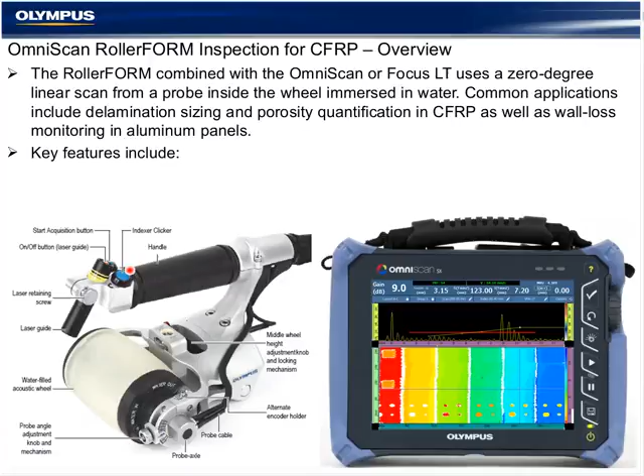It's a perfect companion to the OmniScan SX or MX2, and this presentation will take us through the setup of the OmniScan, the mechanical fine-tuning of the inspection, including the C-scans and acquisition.

Prior to setting up the OmniScan for the wheel probe, the tire must be filled with water using the in and out valves in accordance with our manual. The recommended water is distilled deionized water for best results to keep the chamber clean and free of mold and mildew as best as possible, and bubble free.

Best practice is to fill it the night before to allow the water to completely degas. The bubbles are apparent through the tire material, and there's a bubble trap on the left side wheel flange, that a slight shaking of the tire with the wheel flange in the highest position for the exit of the air traps the bubbles. It's very useful. It need not be pressurized with water, just filled completely.

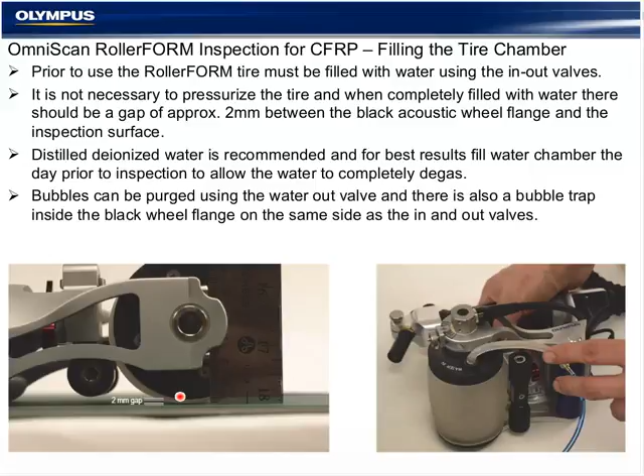A good fill is apparent when we have approximately a 2 millimeter gap between the plastic wheel flange and the component, and if we rock the wheel probe just a little bit, we can see that edge tapping. We don't want too much water in it, or it distorts the tire material and requires a little extra pressure that's not necessary.

There are several mechanical adjustments on the RollerFORM. For convex-shaped components, there is a wheel and skid plate in between the primary rear wheel that will allow a guide. This is locked and unlocked using the red handle. It's lowered into position snug against the component and relocked. For flat surfaces, flat panels, flat CFRP, it need not be used and can stay raised up off of the component.

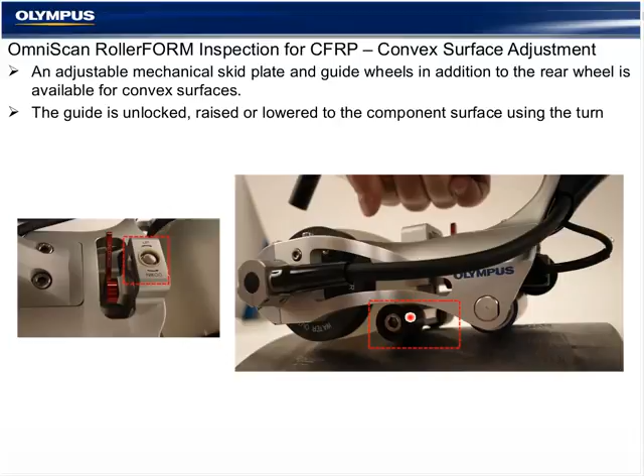We're going to start with preparing the OmniScan phased array instrument for use with the 0-degree linear scan that the RollerFORM wheel probe is designed to generate.

We're going to start going through the wizards for the part and setup. We're going to configure the UT. We're going to work to configure the synchronization gate. The synchronization gate is a feature normally associated with immersion tanks that allows stabilization of the surface interface signal for a really clean, precise C-scan. We're going to build a manual TCG for our sensitivity, and we're going to configure the detection gates and C-scan configuration.

Normal day-to-day use of the RollerFORM is accomplished by opening a pre-configured data file or setup file with the probe frequency selected. This presentation is designed to take us through the entire setup from scratch as well. But normally we save the file and make a few minor adjustments for component-to-component inspection.

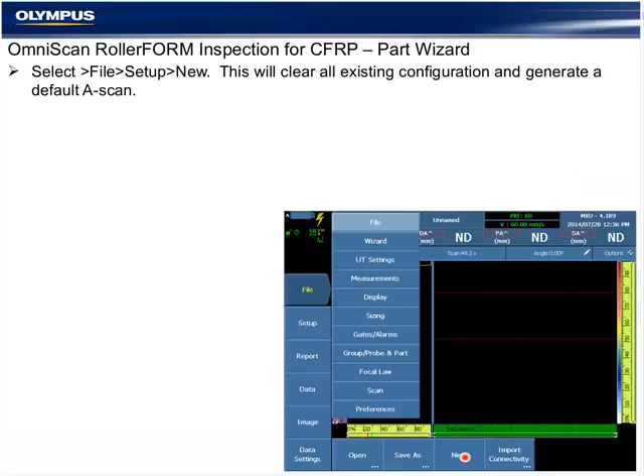So for any application in the OmniScan, to clear out all existing configuration and start with a default blank A-scan, we select File from the main menu and New. This will clear out the group and give us one default A-scan. Then we move into the wizards.

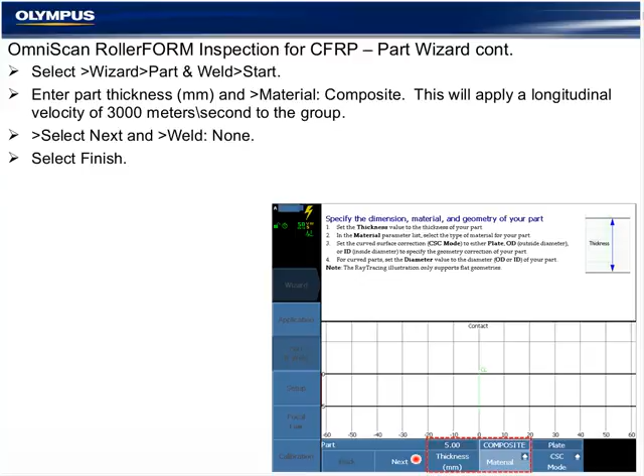On the part wizard, we're going to enter the thickness of the component and select Material Composite. The thickness entered here will have some default value in the color palette and the gate logic, maximum and minimum positions, and selection of the material composite will associate a longitudinal velocity of 3,000 meters per second with the inspection. Continue in the wizard and select Next, where there's no weld associated with this, and Finish.

That will conclude the part wizard, moving to the setup wizard. In the setup wizard, on your first step, you're going to see a group mode, and depending on the instrument model, either an OmniScan MX2 or SX, and the pulser configuration, there could be several options here.

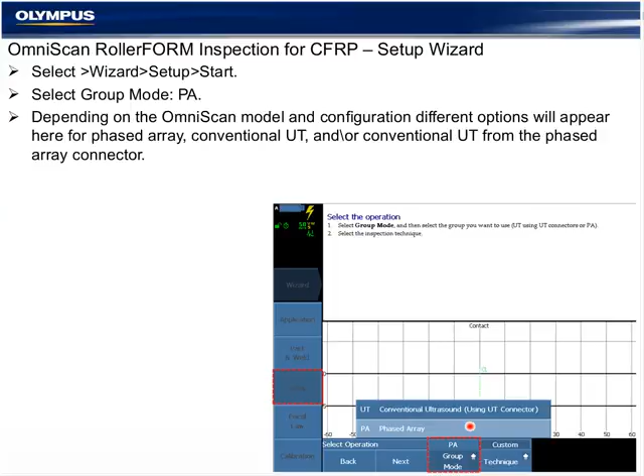The RollerFORM wheel probe is a phased array inspection only. Select phased array. And for the technique, we're going to select 0 degree. The three available techniques that we see here set defaults for the displays, the gate modes, and the color palettes, and they will shortcut our setup a little bit and put the OmniScan in a condition most favorable for this application.

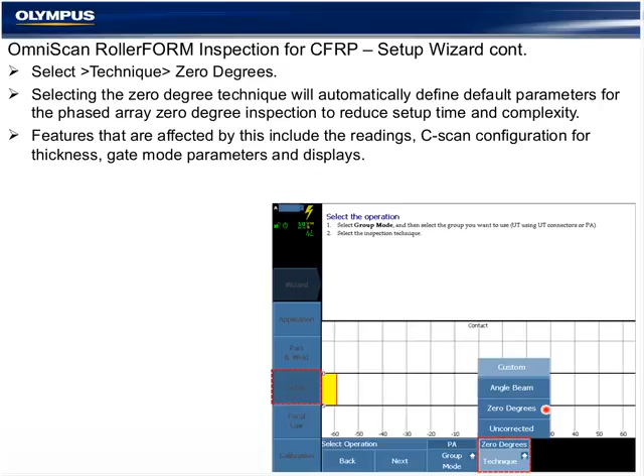Continuing on in the wizard, we will see the auto detect on. All Olympus phased array probes contain a chip that contains the essential variables for the calculator, to include the model, the frequency, the number of elements, and in this case we're going to be using a 3.5 megahertz 64 element probe that has a center-to-center element size, also called pitch, of 0.8 millimeters. The reference point in the probe is the measurement from the edge of the casing to element number 1 inside the wheel.

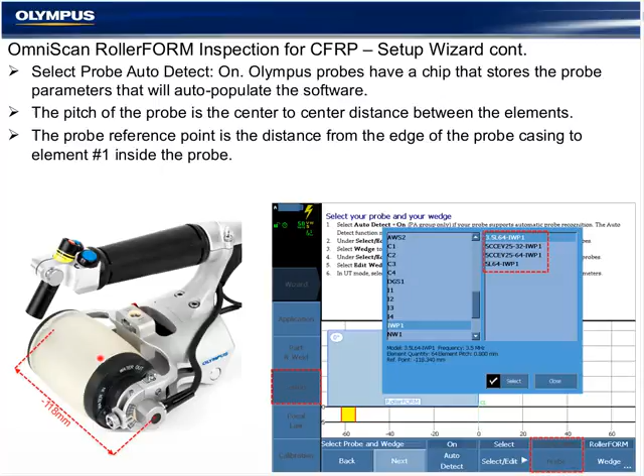The phased array probes are designed and optimized for a near wall inspection, with element 1 on the far right side of the RollerFORM adjacent to the plastic wheel flange, to be as close to the component or to the edge of the component as possible. The left side of the probe is not utilized here and contains a little bit larger wheel flange that also contains the bubble trap. The natural scanning pattern is going to start on the bottom right, moving forward and indexing right to left, that we'll learn a little bit more about.

The several different probe models are available now in different frequencies. All of them are designed to be used in water with an optimized impedance matching layer in water for the probe surface. On any probes in the Olympus catalog where you see a CCEV, it means that the probe contains a mechanical focus in the lateral direction for optimized and improved length sizing on the scan axis. In other words, we're combining a mechanical focused probe along with the phased array focusing for a more precision inspection.

The upside of using a CCEV probe is that length sizing is improved. The downside is once that radius is made, it's relative to a finite range of thickness, which for the composite inspections, normally most of these that we see are a couple millimeters to less than maybe 20 millimeters thick.

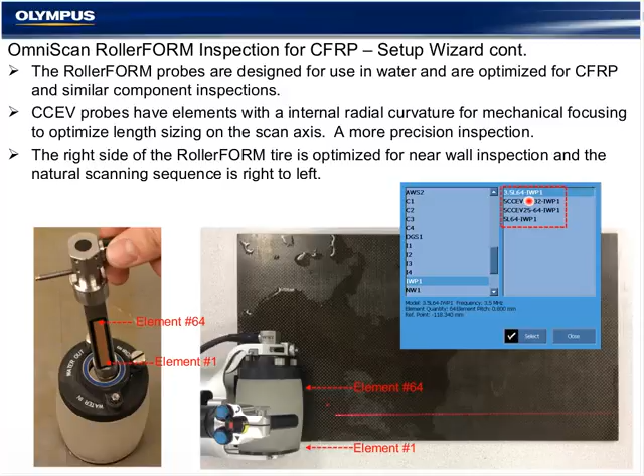Moving on to the probe selection, continuing through the setup wizard, the wedge selection, continuing through the setup. The wedge or the RollerFORM wheel probe is not automatically detected. It is selected from the database. The wheel in the tire material contains a 25 millimeter standoff in water to put our surface reflection far enough out in time it doesn't interfere with our inspection.

It has a wedge material that is water velocity, and it is optimized for a normal 0-degree inspection. The offset for the wedge, and anytime you're using an Olympus wedge from the wizard, as soon as I select this wedge, the reference from the probe is no longer needed, and the reference becomes from the edge of the wedge, and in this case is the far left side of the wheel flange that contains the bubble trap. So we have 64 millimeters from this side containing element number 1.

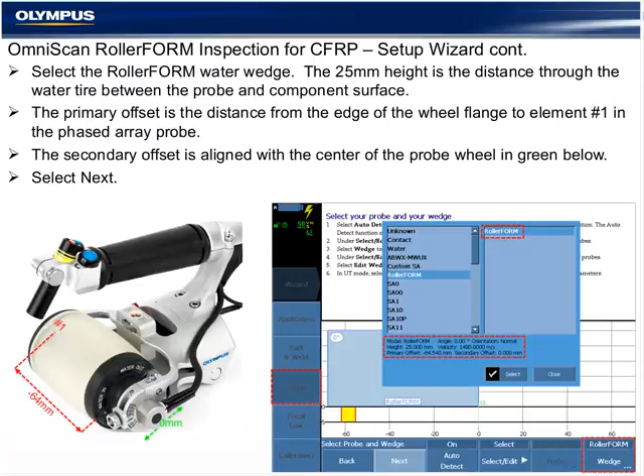Continuing on in the setup wizard, we select a skew of 90 degrees. The skew represents the beam orientation in relationship to the mechanical movement, which is also the scan axis or blue ruler, and should be left at 90 degrees. Our index offset for now is going to be left at 0.

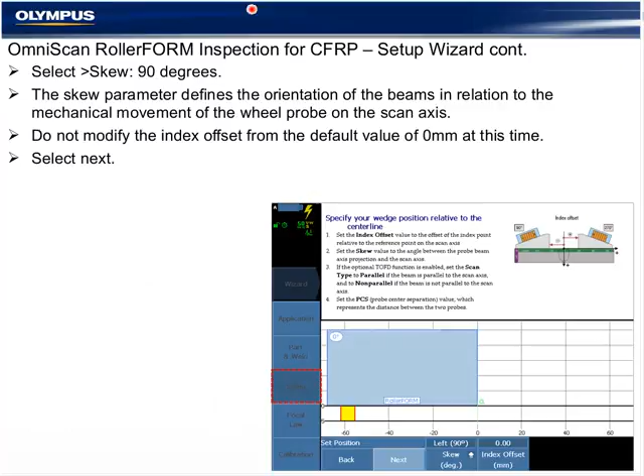At this point, the probe, the wedge, and the component have all been entered, and those parameters are known to the software. Now it's time for the fourth part of our group, which is the focal law. All calculators for phased array, regardless from Olympus, OmniScan, or TomoView, contain 4 parts: probe, wedge, material - those are all hardware with physical parameters that can be measured. The fourth part is the group formation or beam formation that we're asking from the software.

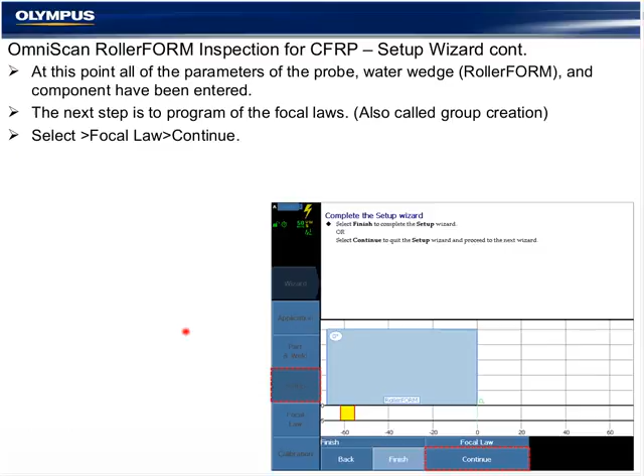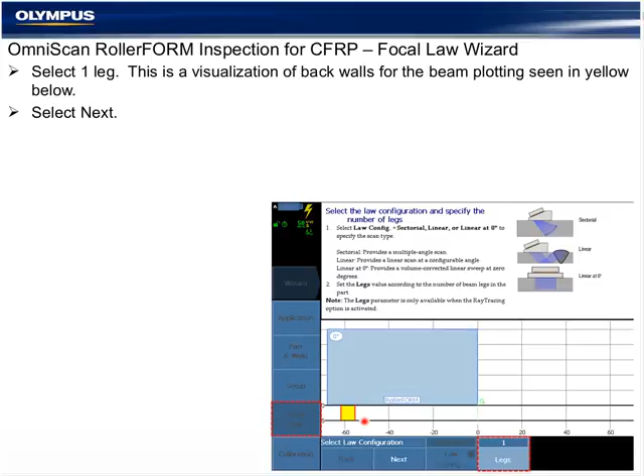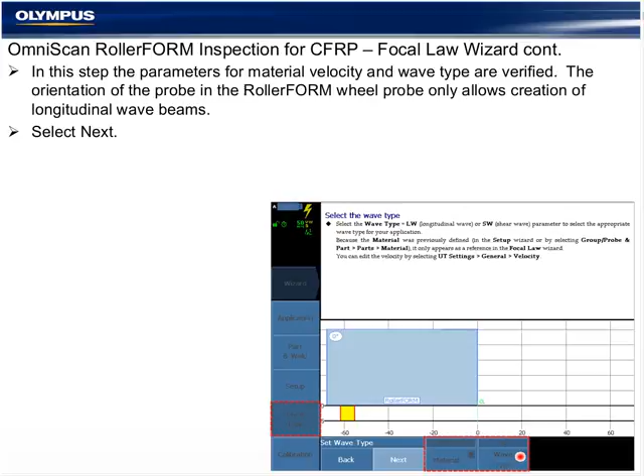Select leg 1, which represents the beam plotting for the inspection. These inspections are going to be a single leg inspection between the probe or water to tire material interface on the component to the back wall. The material was selected during the setup, and the wave type is not selectable here because this type of probe and wedge or water only generates a longitudinal wave type. So skip through this and select next. This brings us to the beam formation or configuration of the focal laws.

It contains 4 parameters. The first determines the element quantity. The element quantity will define the size of the beam by adding or subtracting elements from the quantity. With a 0.8 millimeter pitch probe using 4 elements, we essentially have the equivalent of a conventional 3.2 millimeter probe.

The number of elements here will also affect our total coverage between the first and last element, as this is beam to beam center point. So for most composites that we see, the default value of 4 is sufficient. For a thicker or more attenuative material, you may need to add 6 or 8 elements to penetrate and get a good backwall signal. That can only be determined by experimentation and is a function of the probe frequency and the thickness and attenuativeness of the material.

We want to use the first and last elements of the entire probe, from element 1 to element last, in this case 64, and we're going to step every 1 element. This would mean focal law 1 is elements 1 through 4. Focal law 2, or A-scan 2, would be 2 through 5, 3 through 6, and so forth. So on the electronic or probe side, on the index axis, we have a 0.8 millimeter resolution, the pitch of the probe.

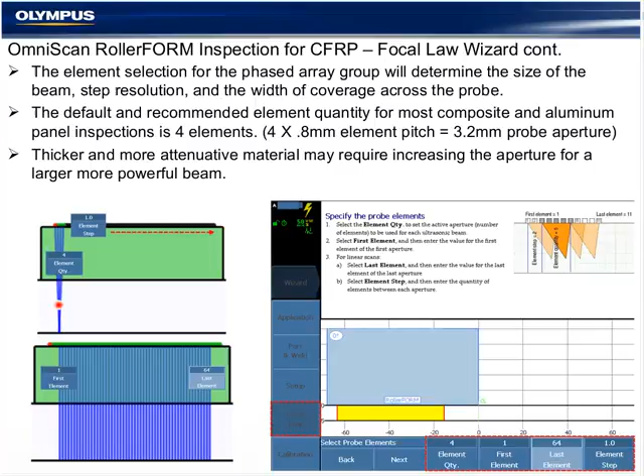There's also the possibility of what's called improved resolution or half-step resolution. For a more precision inspection, where we want to step smaller than the pitch of the probe, entering 0.5 at this step will create a focal law or A-scan of 1 less element in between every A-scan, similarly to the previous slide. That has the effect of creating a simulated or electronic version of a half an element.

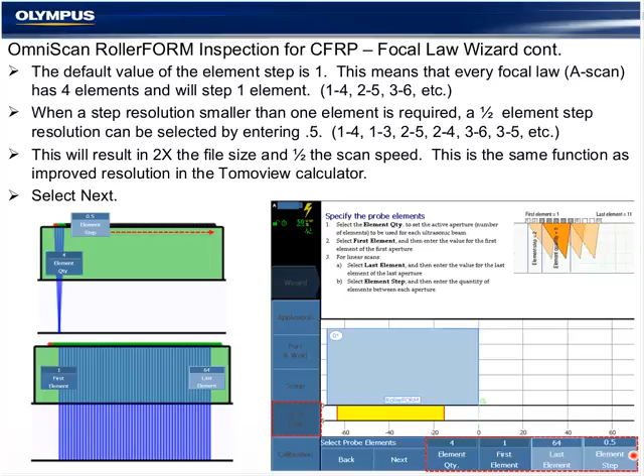In that case, we would be stepping every 0.5 elements. The upside is a much better precision inspection, but the downside is the file size will be twice as large and the scanner speed half as much. If that's not a consideration in the inspection, it's possible. This is the same function as improved resolution in the TomoView Advanced Focal Law Calculator. Select Next.

At the end of the Focal Law Wizard, the software gives us the opportunity to set our gate as to shortcut some of our setup. It has nothing to do with the actual focal law creation. A good starting point would be about 1 to 2 millimeters. We want the gate as close to the interface signal as possible, and we need enough width to include gate A, the red gate, all the way over the back wall. We'll fine-tune this once we get into inspection preparation. Select Next.

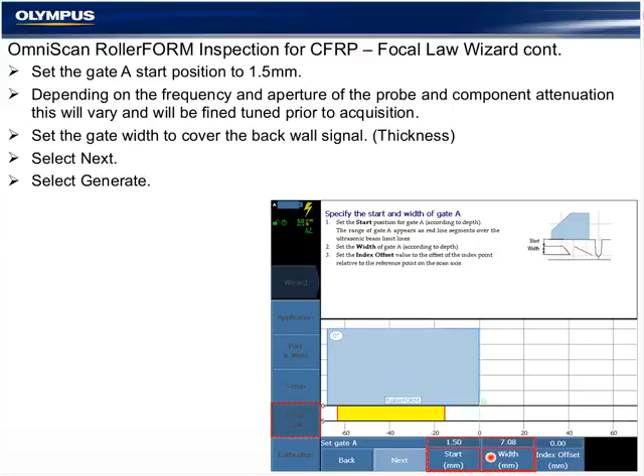At this point, we have completed all of the wizard steps for the probe, the wedge, the material, and the beam formation, and we are looking at the A and S scan. If the A and S scan wasn't already displayed, from the interactive title bar at the top of the screen, selecting Layout allows you access to all of the different layouts, and select A and S.

At this point, we can see this is the water inside the tire material. This is the interface signal of the tire material to the component, and we have a very light detection of the component here. We can also see that as the probe is moved in the RollerFORM back and forth and side to side, it has not been stabilized yet. We see a few millimeter difference on one side of the probe inside the tire material than the other, and this can be due to pressure or the shape of the component or just normal use.

The probe is not stabilized inside the material, but we will use a synchronization on echo to flatten this shortly. This is a normal looking indication when you're initially leaving the wizard setups. The OmniScan has 3 visible gates. A red gate A and green gate B are detection gates, with red being the primary detection gate.

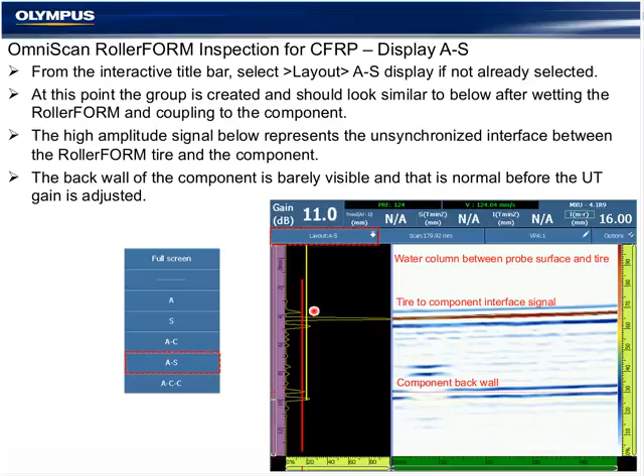It's normal that the yellow gate disappears when we're in A-scan synchronization mode because it's dynamically updating for every A-scan to build the S-scan display, similar to an immersion tank. And as we can see, once we enter A-scan synchronization mode, the yellow gate disappears and my interface signal is completely flat and straight and automatically aligned at 0 millimeters. This is a very important feature for either a RollerFORM or an immersion tank, as it allows precision measurements inside the C-scan to be relative to 0 instead of relative to the distortion of the probe in the tank or the RollerFORM.

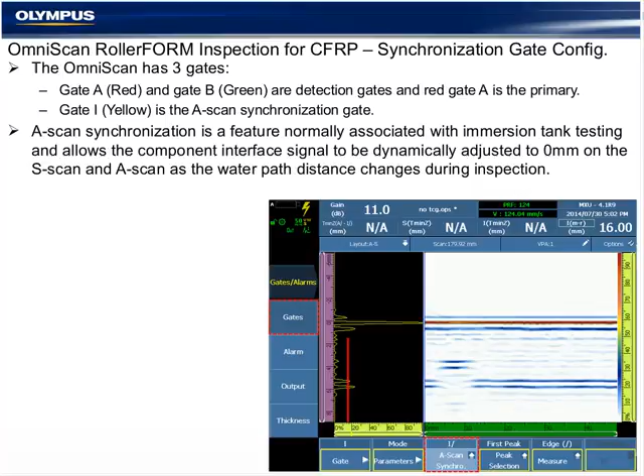The normal mode for this would be pulse. And again, our signals, both for gate A for the detection readings and for gate I for the synchronization readings, are going to be using the first peak that crosses the gate and the edge of that peak. And these functions for the A-scan gates are also included in the readings that are associated with them.

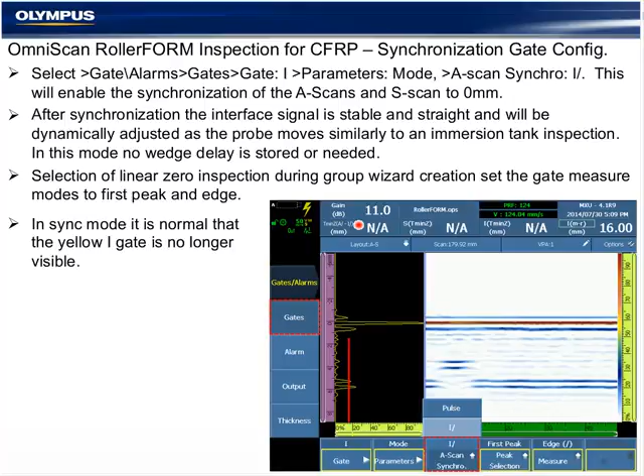After we've gone into synchronization mode and stabilized the signal through the water path, there's a second mechanical adjustment in addition to the middle wheels and skid plate that was associated with this knob. The second mechanical adjustment allows us to rotate the probe clockwise or counterclockwise to optimize the probe orientation directly at 0 degrees to the component. When I move this adjustment, I can see the amplitude of the interface signal either rising or lowering. So I'm going to peak that up to where it's optimized. And when it is, I will lock the probe in place.

And on a flat plate, this is locked in place between the stabilization of the rear wheels and the roller plate. Or in a convex inspection, it would be stabilized between the middle wheel and skid plate and the probe. So loosen the probe with this knob here, turn it just slightly counterclockwise or clockwise to optimize the interface signal in amplitude, and lock it back in place.

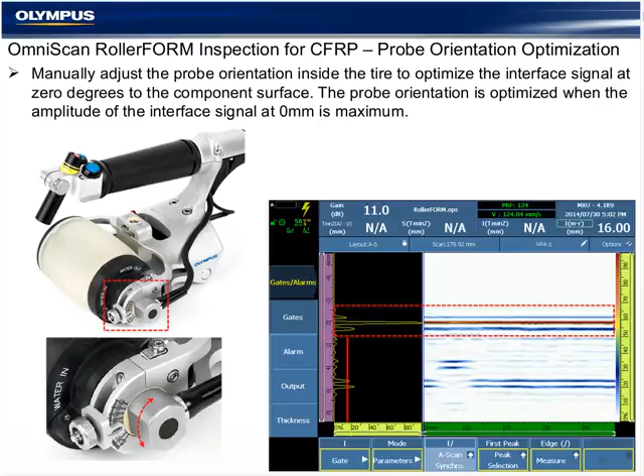After we've done that, we want to go ahead and fine-tune our range so that we have a normal looking display. Start the range at -1 or 2 millimeters so we can see the water column just on the other side of the tire material inside the wheel. Any bubbles that were interfering with the inspection can be seen here. This allows us to validate that the whole S-scan is being detected in the interface gate, the yellow gate I, and set enough UT range so that the back wall is completely visible plus a few extra millimeters.

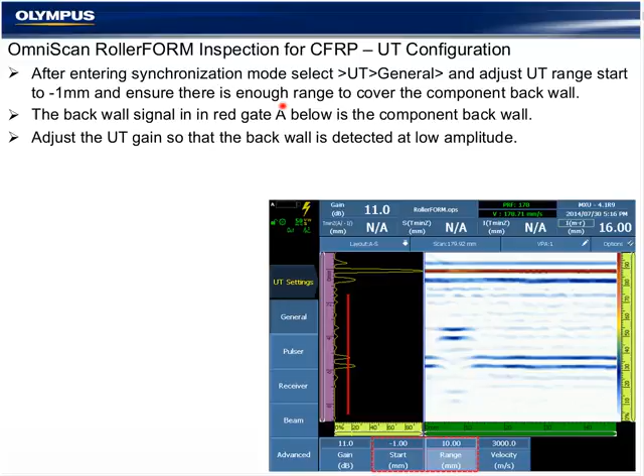At any time, in full screen mode or with the menus visible, tapping on the first half of the UT ruler, which is purple, will enable the operator to adjust the UT start. Tapping on the second half of the ruler will enable the operator to manipulate the UT range. Similarly, tapping on the dB area or the gain area in the upper left-hand corner of the OmniScan display header allows the operator to manipulate the gain, hardware gain, using the rotary knob on the side of the instrument.

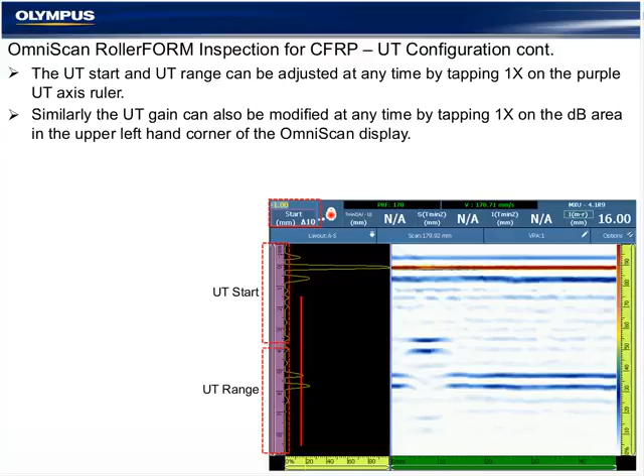So we're now in synchronization on echo or A-scan synchronization mode. We have built the group, which is the sum of all of the focal laws in the S-scan and make up group 1. This is a single group application. And now we're moving on to the UT configuration. Most of the UT parameters are very similar to a single channel conventional flaw detector in that what we do to one applies to all of them.

So we're going to start under the UT menu, under the pulser submenu, and select the voltage or energy appropriate for the inspection. Voltage selection is a function of the element size in the probe, the element frequency, the attenuation of the material, and the thickness of the material. Too low of voltage results in unnecessary gain, resulting in poor signal-to-noise ratio. Too high a voltage will give us a saturated signal even at 0 dB.

So I would suggest starting at 80, which we found works very well for most of the composite inspections, but adjust this appropriately. The pulse width need not be adjusted. It was automatically selected when the probe frequency was detected by the software.

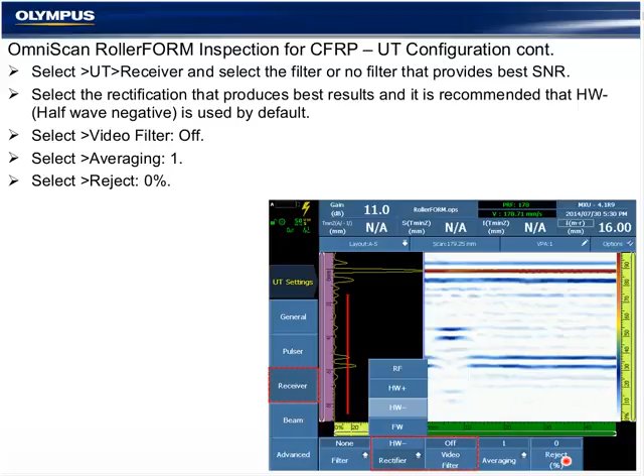And filter selection. The short version is to use the filter that works best. When no filter is selected, we are benefiting from the full bandwidth of the probe frequency, and as soon as we select a filter, it's going to crop off portions of that. Use what works best, but don't be surprised if best results are achieved with no filter selected at all.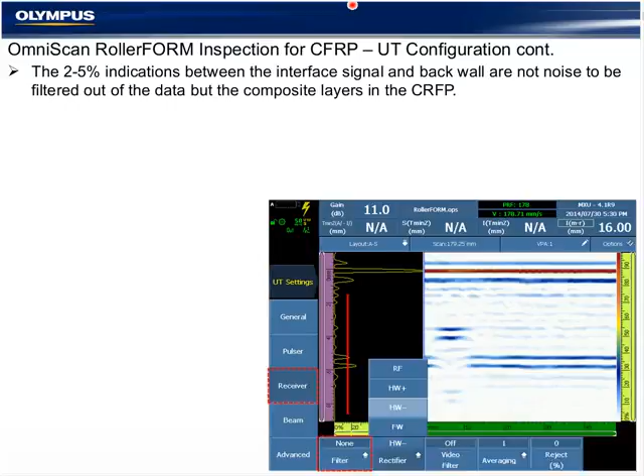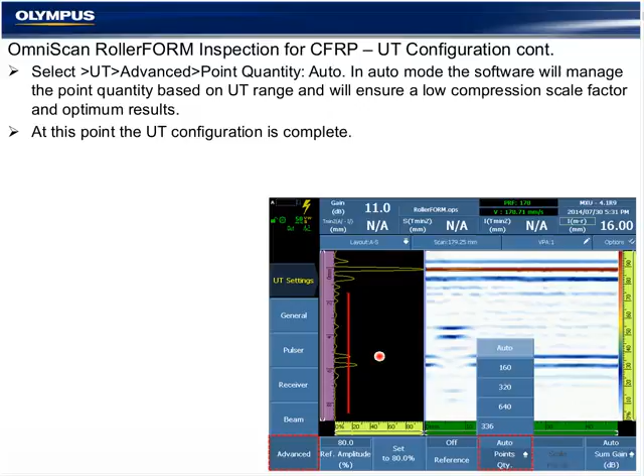Under UT Advanced, change the point quantity to auto. The auto point quantity will ensure a low scale factor and compression factor regardless of what range is being used. The CFRP inspections and typical aluminum panel inspections in the aerospace industry are typically short range, and this isn't an issue like in weld inspection where it becomes a critical function of both file size and acquisition speed. So auto is sufficient. So at this point, all of the UT configuration is complete. Our interface signal is good, and we're preparing now to move on to the next step.

In general, the 0-degree linear inspection, both for aerospace components or for any corrosion type inspection, is defined by its near surface resolution. It's something we want to be mindful of in our setup all of the time. And what the near surface resolution means is the smaller we can make this signal, the better our inspection is, or the more likely we will find a flaw and be able to gate it on our first attempt near the surface. This gate position will need to be as close to this as possible, and again, we'll fine-tune this and talk about it a little bit more when we get into inspection preparation.

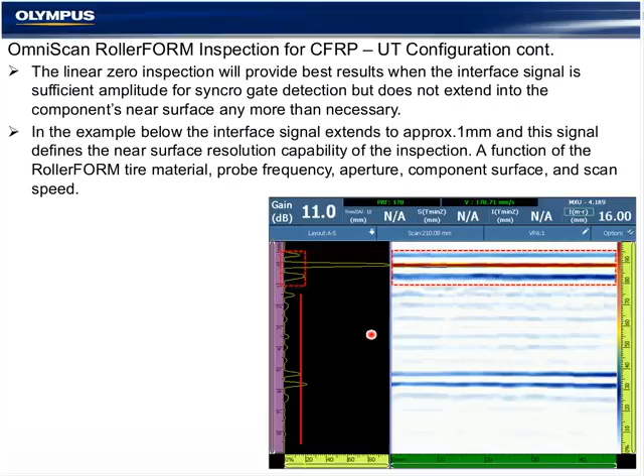So for our good inspection, here is our surface interface signal, and here is our back wall. We need to make the back wall as large as possible without increasing the size of our surface interface, which would hurt our near surface resolution. So how do we raise the amplitude of this signal without raising the amplitude of this one with the hardware gain? We're going to use a manual TCG. Select Menu Sizing, Submenu TCG, and select TCG.

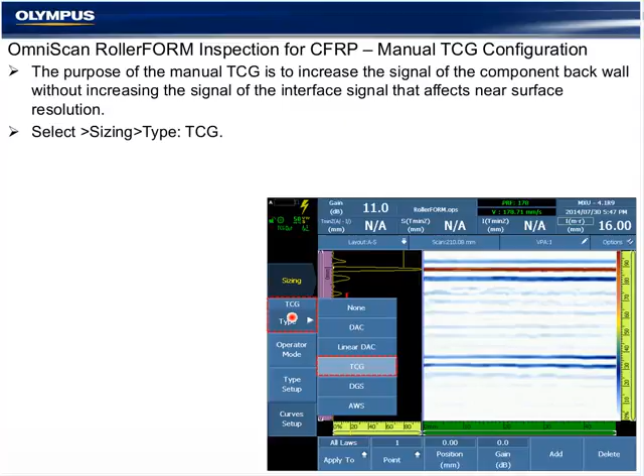After TCG is selected, select Curve Setup, and you will see a default point 1 with no gain at 0 millimeters by default. We're going to move the position, and we can see the TCG point is the white dot right at 0 amplitude on the UT ruler. We're going to increase the position here to move our TCG point slightly off the interface so that no gain is realized prior to the TCG point.

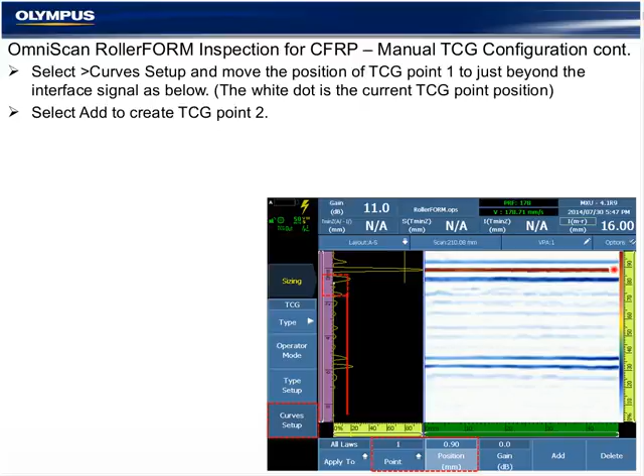Select Add to create TCG point 2. And by the way, this same TCG curve is applied to every A-scan. This is A-scan first. This is A-scan last on the S-scan. It's applied evenly to all of them. So on TCG point 2, change the position until the white dot, which determines the current TCG point, is directly on the backwall signal like we see here at 5.82 millimeters.

And manually increase the gain here until the signal is approximately 75 to 100% amplitude. Since we're using a first crossing signal, it doesn't matter if this signal is saturated or not, but the best of scanning techniques would normally have it pretty close to 100%. This ensures a minimum loss of data in the gate and a maximum acquisition for our C-scan creation.

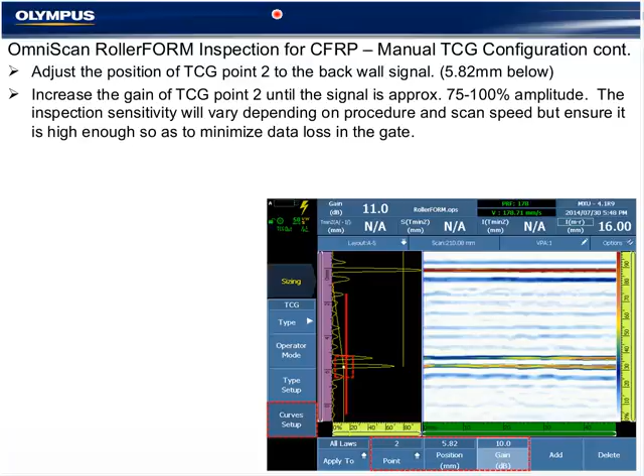So it's time to add the C-scan to the inspection now that we've fine-tuned our UT and our inspection sensitivity. From the interactive title bar, select the layout by tapping on this area in the touchscreen and select the ACS layout that will enable the C-scan. The default C-scan that you see now is a time-based C-scan that will move at the speed of the PRF based on the inspection resolution, and we can see it's based on time from our clock acquisition that we see here.

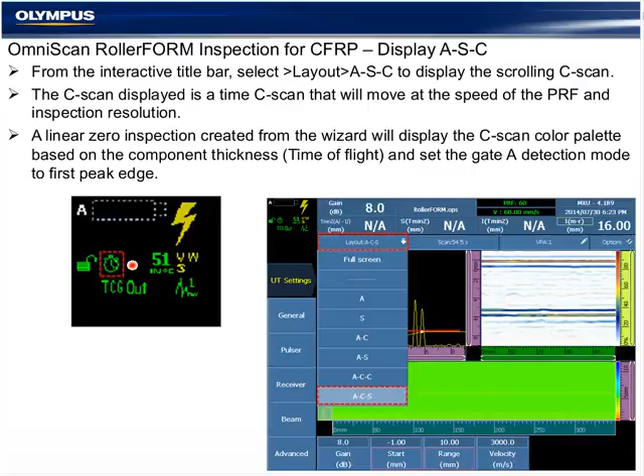Change the gate thickness source under the gate menu, submenu thickness, select source, and we're going to use for the color palette and for our readings the signal in gate A crossing here minus the signal in gate I crossing here. That will ensure a stabilized reading from 0 millimeters at the surface interface.

Enter the minimum and max. This is defaulted to the part thickness and it can be adjusted. This thickness range here will determine the purple scale that we see here, and it can be shortened during analysis mode as part of fine-tuning our analysis.

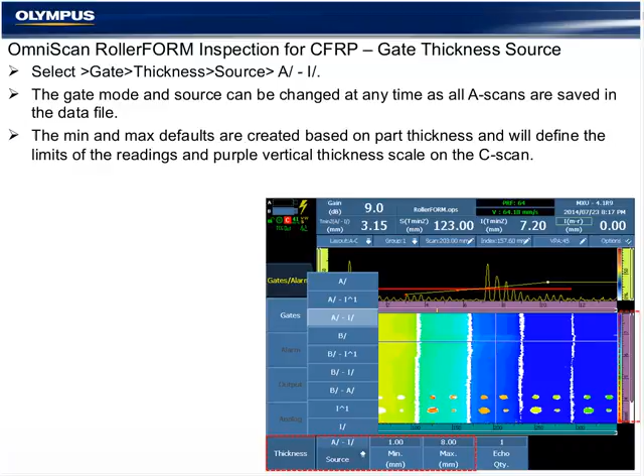Continuing on to the display color palette, select Menu Display, Submenu Properties, Color Palette Depth, and by default we'll see the same scale here. In the previous slide, that min-max range controlled the purple ruler on the UT reading here, and this will scale the color palette over that value from red to blue. And that can either be a compression or exclusion mode.

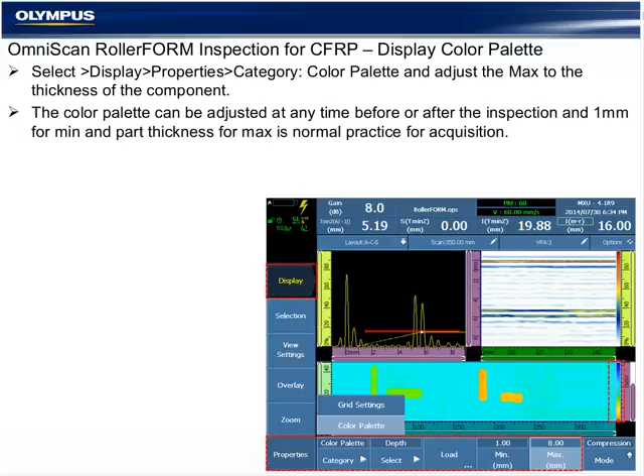And we can see here that the color pixel seen in the C-scan is a function of the arrival or time of flight of the leading edge signal in gate A, and its color is determined both by the scale that we see here under the UT gate thickness, source, and the color palette distributed. As I change the color palette min-max, I will also see this contrast change inside the C-scan. The default values are normally a great place to start.

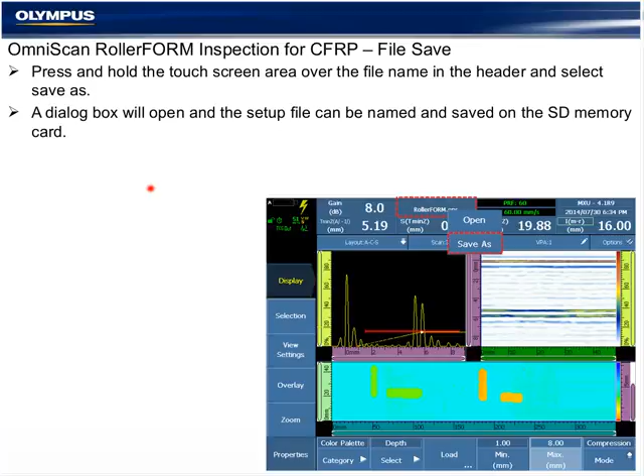So at this point, our configuration of the OmniScan, not including the hardware from the RollerFORM yet, is complete. The phased array was configured for a linear 0 degree scan using all 64 elements of the probe. Our gate mode position was optimized. We are in A-scan synchronization mode that was determined from our yellow gate I, and we saved the file by a press and hold on the file name area of the OmniScan header. Select Save As, and a dialog box will pop up to allow us to save the file on the SD memory card.

The next part of the presentation, and this is a separate presentation in the follow-up files that you'll receive from this webinar, is a configuration of the hardware on the RollerFORM wheel probe with the OmniScan. So that's going to include the configuration of wheel encoder 1, which is associated to the scan axis. It's going to configure the increment button that we see here on the RollerFORM that works as a clicker on encoder 2. And it will include the configuration of the DIN, or digital input button, for start acquisition and clear inspection, for repetitive inspections without having to touch the instrument.

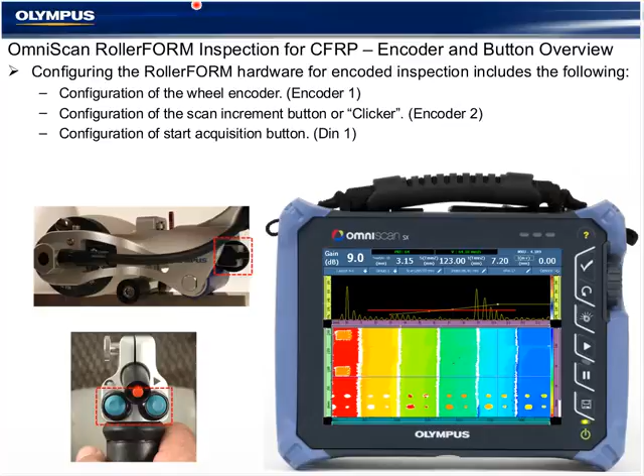So the first part of this is the encoder 1, and to put the instrument in encoder 1 scan, we're going to select Scan Menu, Inspection, and we will change our type from time, that we saw as a little clock in the notification area, to raster. When we select raster scan, it will slave one of the encoders that we select to the scan menu. So when we select encoder 1 here, which is wired to the wheel on the rear wheel guide, it will slave this wheel encoder to the blue axis, also called the scan axis.

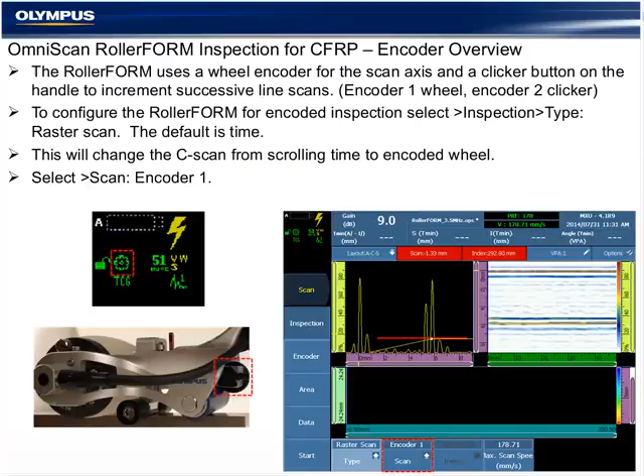Selecting Scan Encoder allows us to configure the resolution and type for the wheel. This is a standard Olympus quadrature encoder. It has a resolution of 12 millimeters that is written on the encoder. You can also calibrate the encoder if that's part of your procedure, or if something has changed that would have affected the resolution, under the wizards for calibration and encoder. We can inverse the polarity and change the direction for scanning forward or backward.

This encoder 1 is slaved to the scan axis, which is also always visible in the interactive title bar. When this number is red, it means that the current encoder position is outside the defined area of the C-scan. When it's blue, it means it's inside.

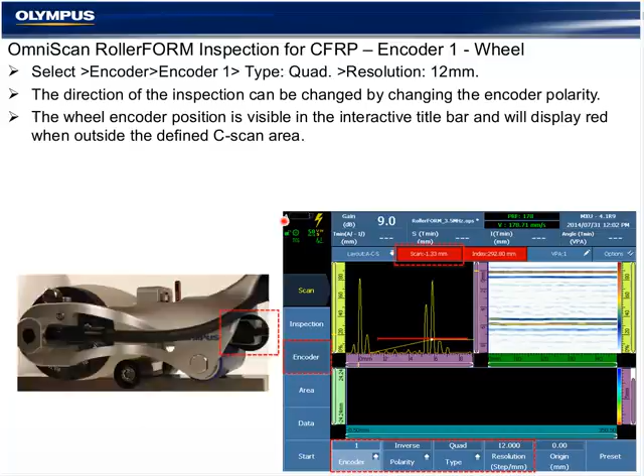The wheel encoder has a second position that it can be installed in, with instructions in the manual. So for smaller components, small radius components or convex components that are not utilizing the rear wheel guide, the encoder is working directly on the wheel flange of the tire. And there's detailed instructions for moving that in the instruction manual, and the encoder cable here is integrated into a nice ergo handle that includes the umbilical back to the instrument with the encoder and digital input cables.

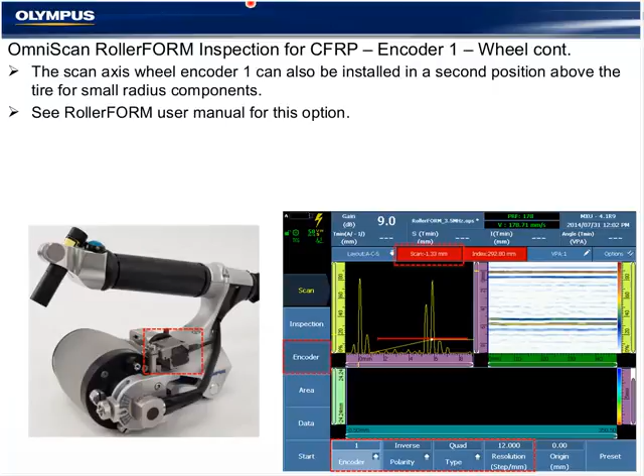Okay. Select Scan Encoder and change from encoder 1 to encoder 2. Encoder 2 is going to be a clicker and preset type encoder, and it has a resolution here that's automatically determined by the software based on the phased array configuration. We're going to talk about this a little bit more in a few slides, but the software knows at this point that center beam 1 to center beam last is 48.8 millimeters. So every click of this button will index the index axis position 1 stroke, or 48 millimeters, as it's incremented.

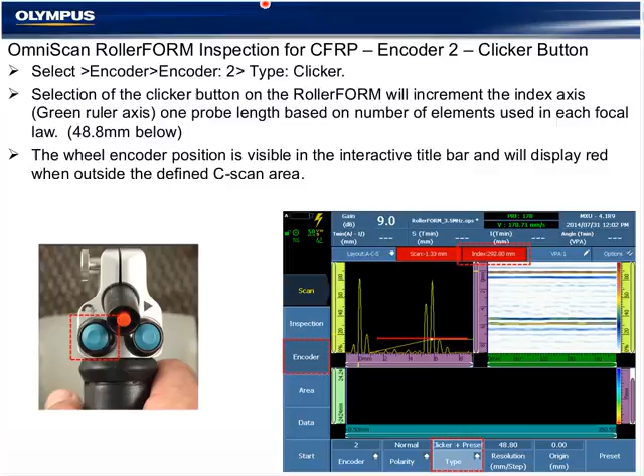And the normal inspection process for that is we have slaved the scan axis wheel encoder 1 to the blue ruler. So as I move it forward, we'll see that incrementing here. As I click the indexer button, it's going to increment me over. So I'll take one line scan to the end, reposition the RollerFORM, click the button, and it will automatically be ready to take the next acquisition.

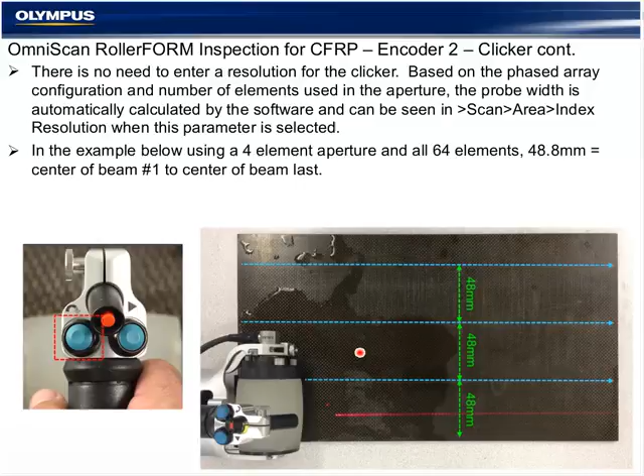There's a second button available on the RollerFORM handle on the right side, which is associated with the digital inputs that come through the same cable and connector as the encoders. These are configurable and programmable inside the software.

So select Menu, Preferences, Setup, and turn the state off. When the state is off, the options appear for the DIN, and there's several of them. DIN 1 is the only one that's wired to the RollerFORM. So any of these options are available, but the one that's defaulted in the setup files that are provided and the most useful for this day-to-day operation is the Clear All.

So when I click this button, based on my configuration here, it's going to clear the C-scan data, and it's going to set both encoders back to 0, indicating I'm ready for a new inspection. And we do that just after repositioning the scanner correctly.

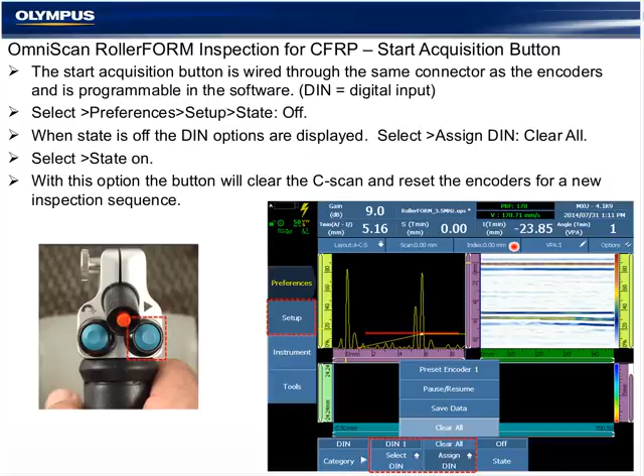So at this point, the phased array and UT has been set up. The hardware for the encoders and the digital input that interface the RollerFORM to the OmniScan have been set up, and we're ready to start preparing for an acquisition.

Our normal process for an acquisition would be to recall a pre-configured setup that we've just completed, enter the component thickness, for this is a new inspection and it'll probably change every one. We're going to fine-tune our sensitivity, fine-tune our gate position, define the current C-scan area and inspection resolution, and then we will acquire data and save the file.

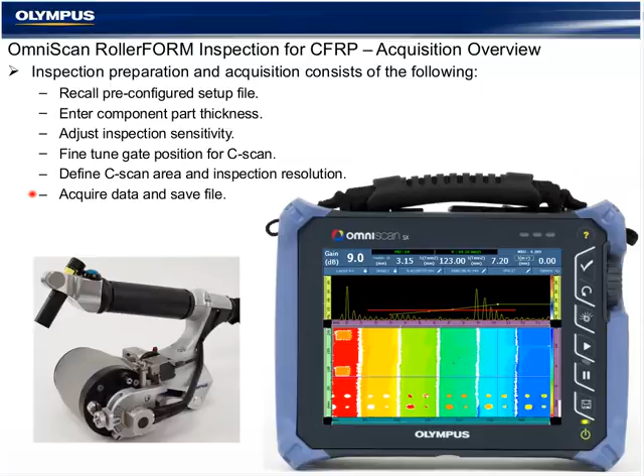So again, you're going to be provided default setup files with all of these parameters configured. This third presentation is designed to be used with either one of those files we've provided or the file you would have just created that we went through up to this point.

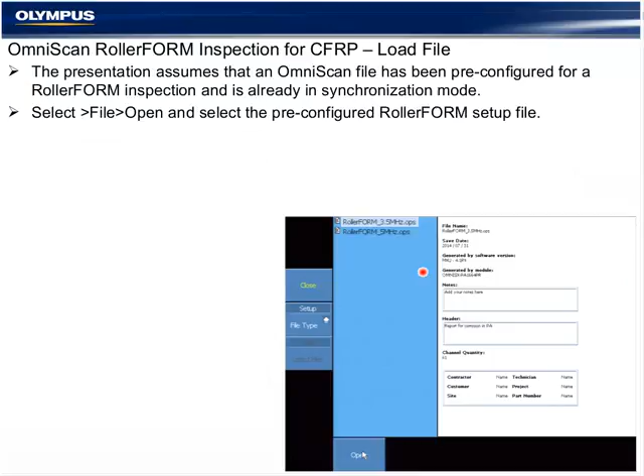On the OmniScan file name area, press and hold, or go to File, Open, and we'll see under the Setup filter the various setup files for the RollerFORM or the ones that we've already created ourselves.

So we initially input the part thickness during the group wizard. This same parameter is available from the Group/Probe & Part menu, Parts submenu, and enter thickness in millimeters or inches, depending on which mode the instrument is in.

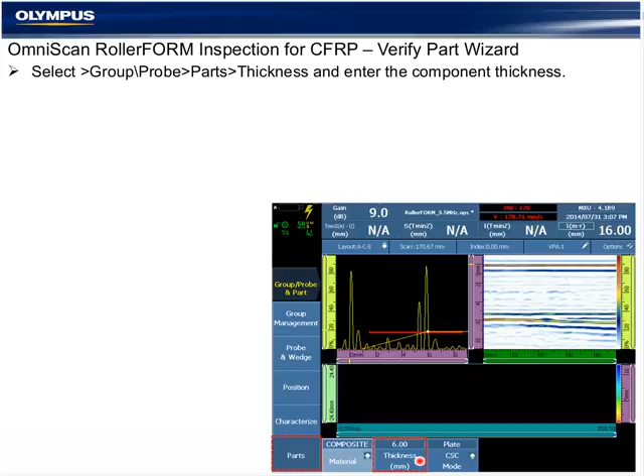We're going to fine-tune our gain a little bit, which will mean adjusting the TCG point directly over the back wall of the new component's thickness and raise and lower the gain. So we're going to make a hardware gain adjustment or general gain adjustment that will raise and lower both of these. And I'll make a TCG gain adjustment in the same spot that we saw earlier just to try and maximize this signal here.

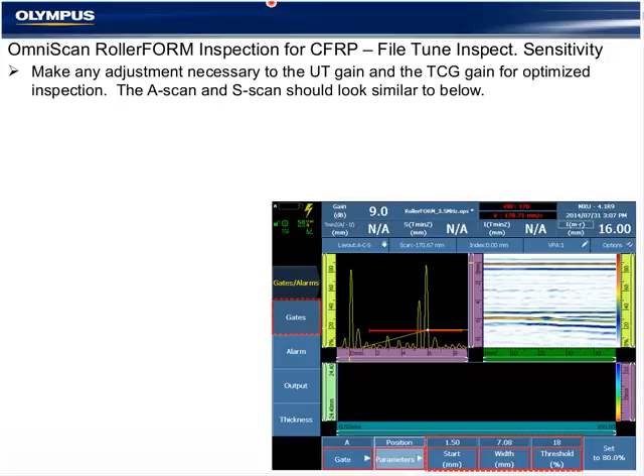Okay, we're going to optimize our gate. The gate is available from the touch screen. If I touch the gate in this area here, I will get the start in the upper left-hand corner. The middle, I will receive the threshold, and tapping the gate on this end, I can adjust the width. These are displayed here under the gate submenu.

So we want to put this gate as close as we can to the interface so we don't interfere with the inspection. The result of putting the gate too close to the interface means that it will generate red pixels of the shallowest readings throughout our C-scan. This can be changed in analysis mode after the inspection at any time because all A-scans are saved.

The width of the gate needs to include the total back wall, here. The threshold needs to be high enough so it doesn't include the layers; this isn't baseline noise, but the actual composite layers.

There was a question about what options, if any, are available on the probe width. There are two options: a 32 element, a small version of the wheel probe, and the 64 element. The 64 element probe would be 64 total elements times 0.8. So if you were theoretically using a one element aperture, the maximum width would be 51 millimeters. With 4 elements, it would be about 48.

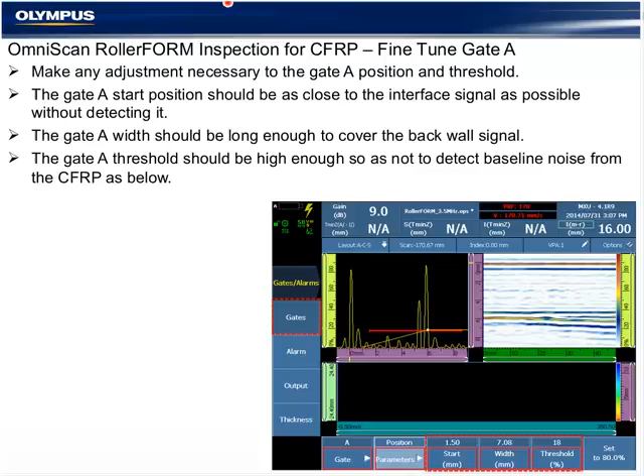We're going to fine-tune our C-scan a little bit for the index offset of the probe. When we selected raster scan from the scan inspection type, the software automatically moves the 0,0 position on the probe to the center of the probe. This is a feature that's used in immersion tanks that makes rapid scanning with overlap extremely convenient and fast.

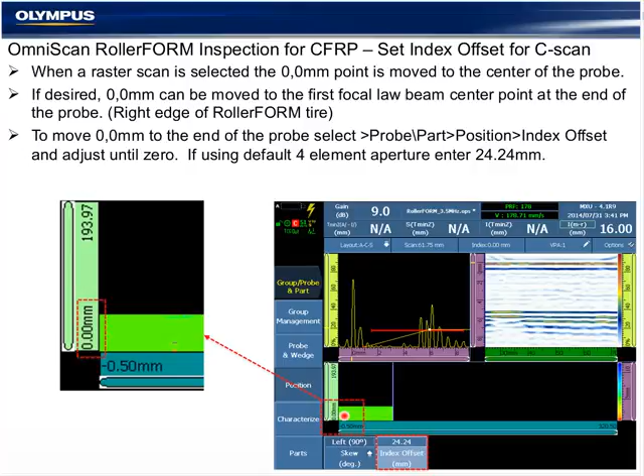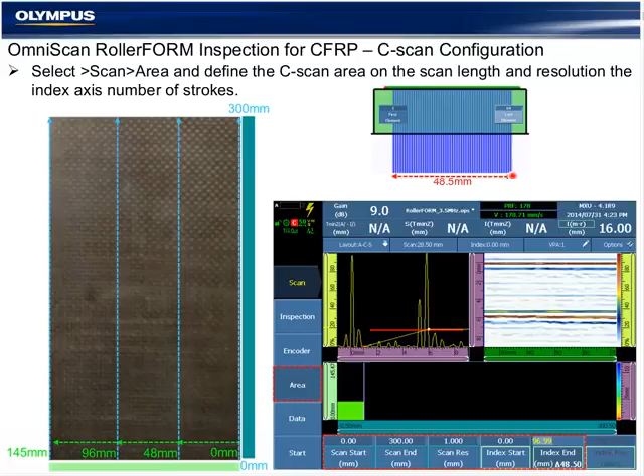When a red C is present in the upper left-hand notification area of the OmniScan header, it's an indication that the C-scan is in compression mode. Compression mode occurs when there are more data points in the C-scan than available pixels on the window of the OmniScan or on the window of your computer, which would be based on the size of your monitor. Compression is very important for this type of inspection because it ensures you don't miss a critical data point.

When in compression mode, the software will allow 1 pixel in the C-scan to represent 4 or 16 pixels in the data, and it will ensure that it's always displaying the pixel color of most relevance, which is the thinnest color for 0 degree and position C-scans, or the maximum amplitude for amplitude-based C-scans typical of weld inspection. Zooming on the C-scan will eventually make the C go away. It's completely normal to do analysis while we are in compression mode, as we can be sure not to miss a critical pixel from the compression feature.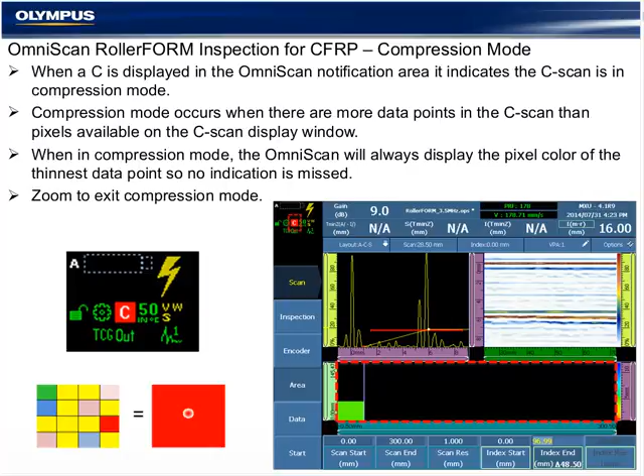Placing the RollerFORM with this wheel flange at its highest position, gently tapping on the roller material on the tire and moving it around and tapping on it, we can see the bubbles inside through the tire form. It's opaque, and they will be trapped in this, so it's very efficient. Even when there are bubbles present, they only degrade the inspection on an overhead inspection where the bubbles are in between the probe and the component surface. In normal flat or even angled inspection, it's not normally a concern, but it's very easy to get rid of them using the bubble trap and the out valve as well.

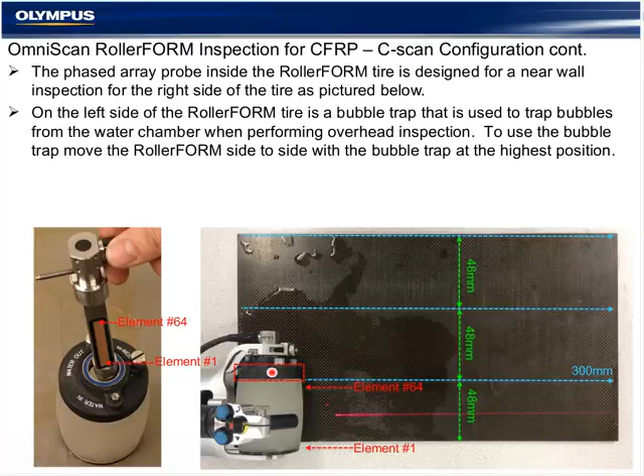So we're prepared for the inspection. We've got our acquisition ready, all the phase array, the encoders, all the hardware. We've configured our C-scan. I moved the beam center point directly under focal law, or A-scan number 1, which would be here and here. And I'm ready to start the acquisition.

I'm going to turn on the laser, and I'll twist it so that it's aligned straight with the component. I could have prepared ahead of time some chalk marks on the composite or aluminum panel to align my 48 millimeter stroke. I can have a scan speed of 178 millimeters per second. Again, that's very fast and typically a lot faster than most people would scan comfortably without losing data points.

This wheel material is permeable, and saturating that real good with water prior to the inspection allows a very light spray. This picture is showing a lot of water, but it really just takes one shot from the water sprayer. A real light spray is sufficient.

So we will select the Start Acquisition button here, and that will clear the C-scan. It will reset the scan and index encoders at 0-0, preparing us to take the acquisition. We would normally be in full screen mode from the layout on the interactive menu. In full screen mode, I don't see the menu options, and we see a much larger area of real estate on the display for our actual data.

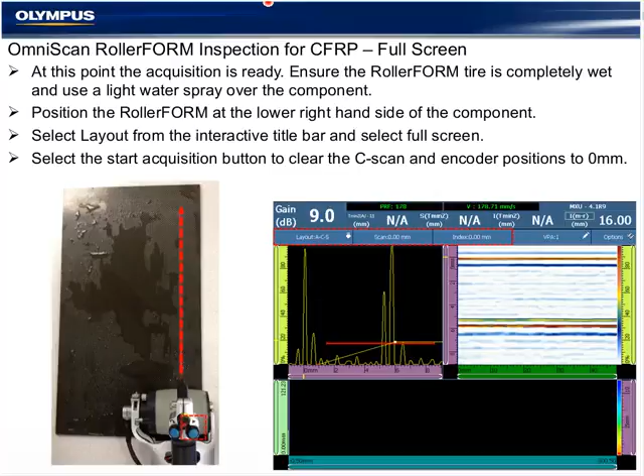So I'm going to move the RollerFORM forward to the end of stroke 1, collecting the data. Again, this color palette was a function of our thickness and my configuration under the gate thickness source menu and the display properties color palette menu that control this vertical bar, purple ruler, and this vertical color palette scale.

I move all the way to the end of the first stroke, and I continue scanning so that my scan axis is outside the defined C-scan. Why I do that is because when I reposition the scanner for my second stroke, if I'm outside the area of my C-scan, I won't contaminate any of the last data that I have.

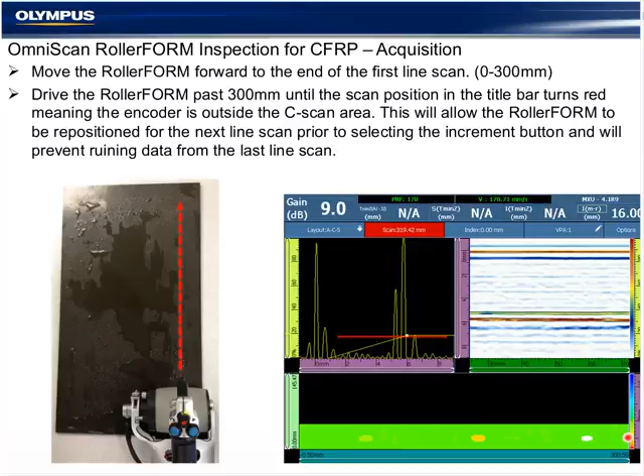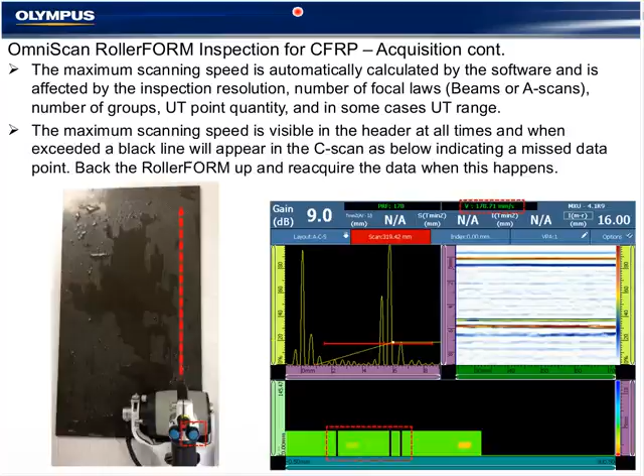So I finish stroke 1, reposition to the second stroke. If I have any missed lines of data from the encoder, moving too fast or too jerky, I can back the scanner up and redo that. My scan speed is set, but any jittery or quick stop and start can generate these missed data point lines. It's a two-way encoder, so I can move the scanner back and reacquire the data. It will always retain the last data taken unless changing the default in the OmniScan.

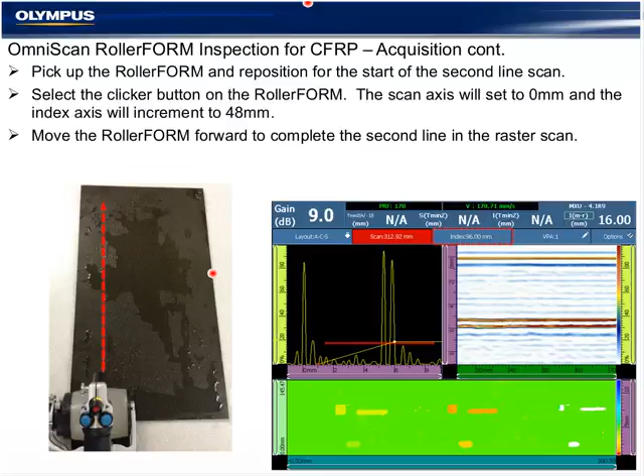So once the scanner is in position for the second stroke, it's normal I would have a long scan axis here. I hit the clicker button, and that's going to set the index axis to 48. It will reset the scan axis to 0, and I can complete the second line scan. I'll repeat the same process for the third line scan.

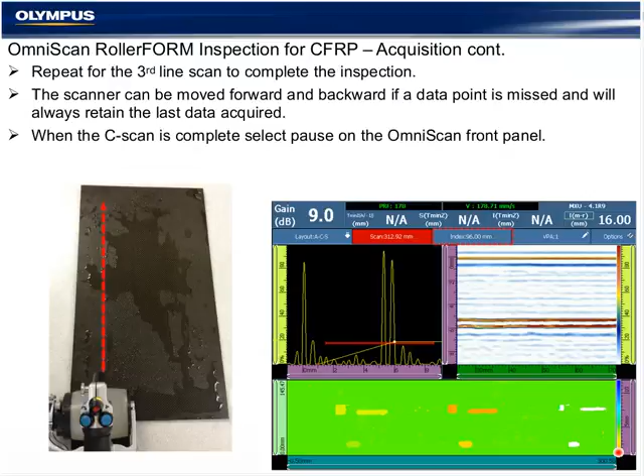When the inspection is complete and the C-scan is filled, I will hit the pause instrument on the outside of the OmniScan. I go to File, Data Settings, File Name. Double tapping any parameter will generate either the number pad or the keypad where applicable. Enter in a file name and select File Save.

This will create the data file I just acquired on the SD memory card for analysis offline using TomoView or on the OmniScan. In the follow-up email, we'll see more information, including the presentation that includes the TomoView analysis of composite inspections. So that took us through the setup and acquisition, the configuration of all of the hardware and encoders, the setup and configuration of the phase array and UT properties from scratch.

But again, our day-to-day business is normally recalling a file, modifying the part, the gate position, and C-scan, fine-tuning the gain, and continuing. So we're going to leave it there.